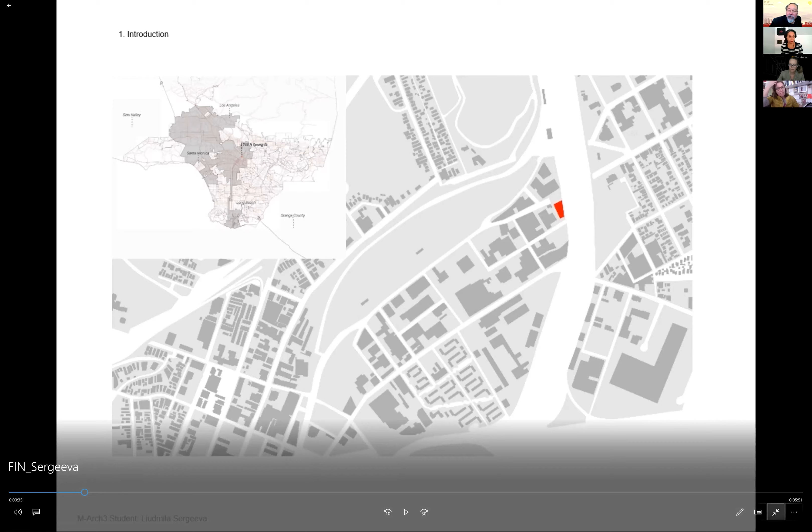Ludmila, are you presenting right now? Because we don't hear anything. Yes, are you going to share some sound? Yes, I'll do that again, looks like a little bit of technical difficulty. Okay, thank you for letting me know. Yes, I'm doing it again. Please let me know if everything is good. Sure, sharing.

Office buildings in Los Angeles typically have high energy consumption intensity. As a result, vulnerable communities across the Los Angeles area cannot afford to build them and use for dire needs. However, by adopting certain design strategies and incorporating PV panels, it is possible to sufficiently reduce the energy demand.

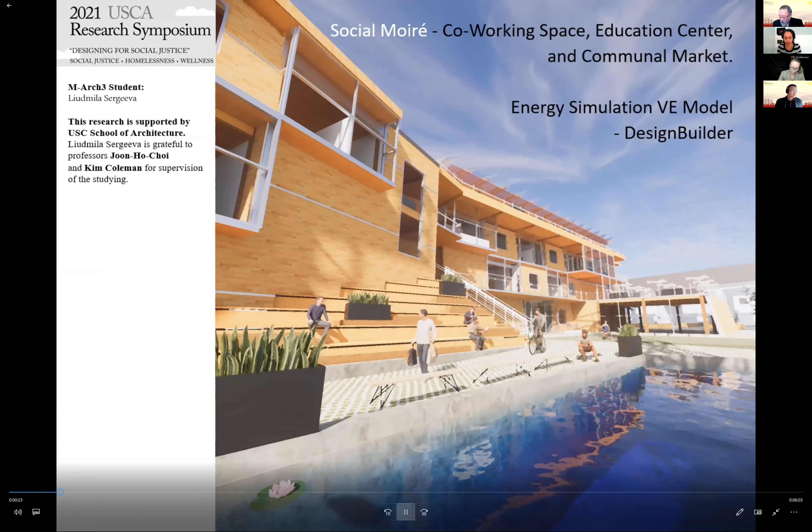The Social Moire project is within the boundaries of the CASP, the Cornfield Arroyo Seco specific plan. The CASP covers 660 acres of land in Chinatown and Lincoln Heights. The project site is within the boundaries of the LA River Buffer area, covering 20,000 square feet.

The Social Moire project provides many options for occupants. Its flexible environment has massive potential in every sector, such as wellness, technology, and different working environments. In accordance with the LA plan, low-cost co-working space can significantly help reduce homelessness by 2028 by providing more business opportunities and helping local communities become stronger and prosperous.

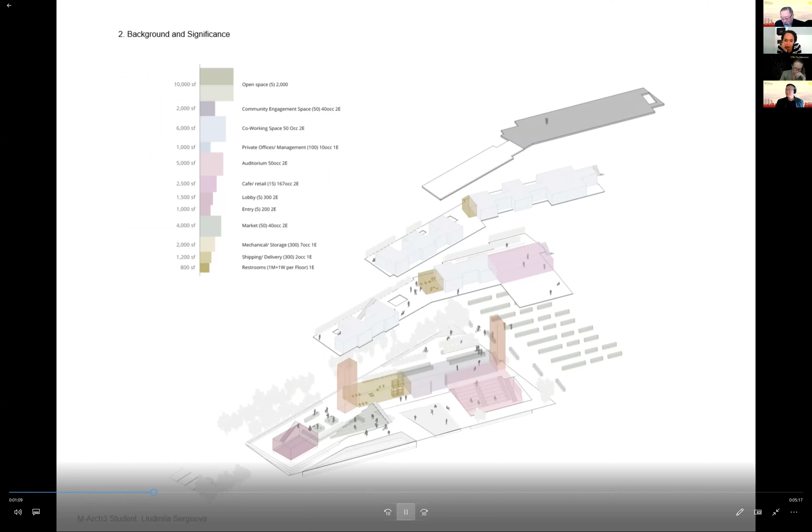Design principles of the Social Moire project, an affordable co-working space and educational center, were tested to evaluate building performance. The as-designed phase calculation includes CLT exterior wall efficient construction, HVAC air-to-air heat pump, and low-E triple glazing.

The as-improved phase calculation includes west-south part wooden battens fence density calculation, cool roof contribution and energy demand reduction, overhangs on the east-south part of the site, and PV and BIPV calculation.

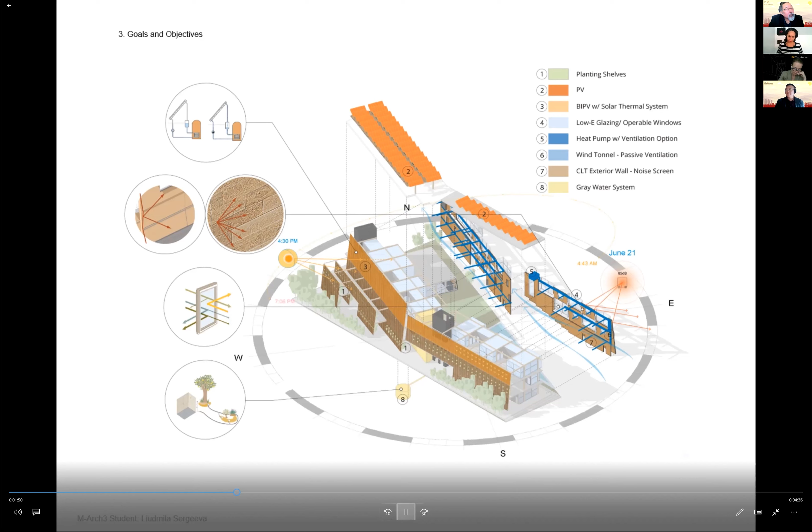Methodology Part 1: the climate features were collected via Climate Consultant, Revit sun and shade simulations, and Revit Insight solar radiation analysis.

Methodology Part 2: to prove the proposed design principles of the Social Moire project, Design Builder platform was used to make a virtual model and evaluate building performance. The project was done in Revit BIM application, and the model was exported to the Design Builder software.

Design Builder is an interface for the Energy Plus software. It supports detailed mechanical and electrical system data. Final energy analysis includes the building envelope, exterior wall, overhangs, and glazing type proposals, as well as HVAC system and PV panel demand to approach net zero protocol.

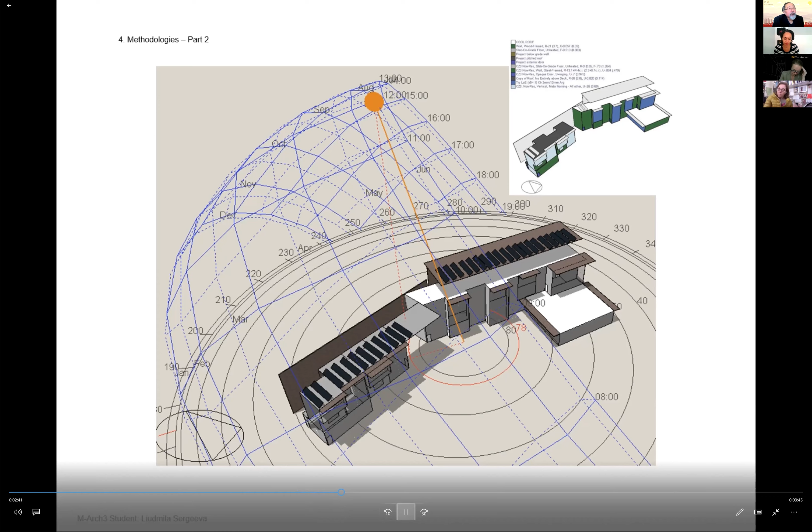The first phase of simulation, as designed, includes three main architectural strategies: CLT exterior wall efficient insulation construction at R21, 3.7 density, U-factor 0.057; low-E triple window glazing, E5=0.1 argon; and air-to-air heat pump as the HVAC source.

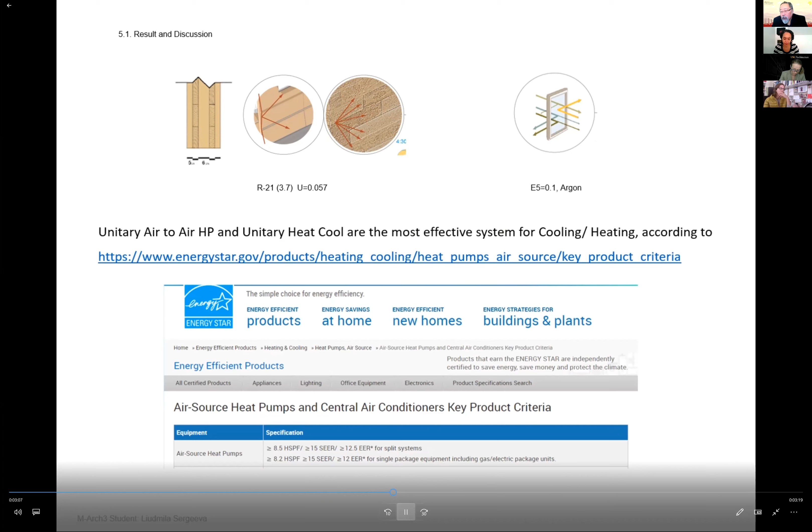After the features were applied, the simulation was done. Graphs and tables were produced, including fuel breakdown, temperature and heat gains, temperature and heat loss, and the end-use summary table was generated.

The second studying phase was the improved phase. In this phase, another three architectural strategies were tested. The first one was the west-south part wooden battens fence density calculation.

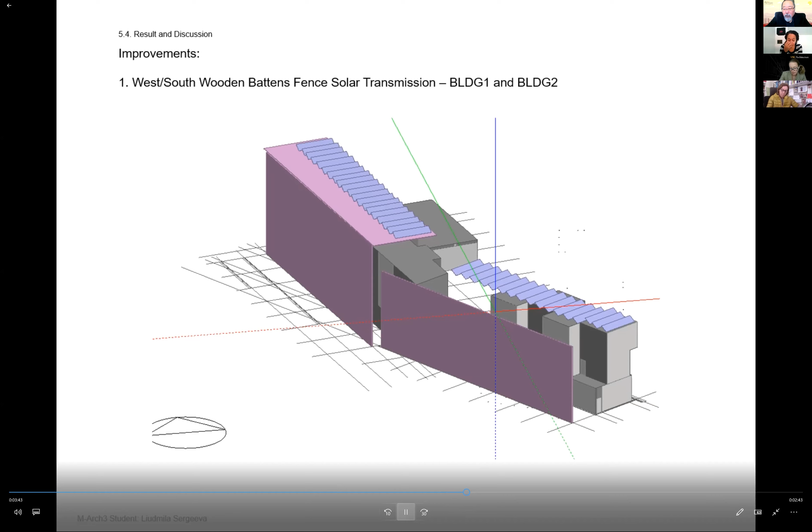As a result, 40% solar transmission was the most efficient for the project. The next improvement feature was overhangs on the west-south part of the site. These features were applied to the model using Design Builder settings.

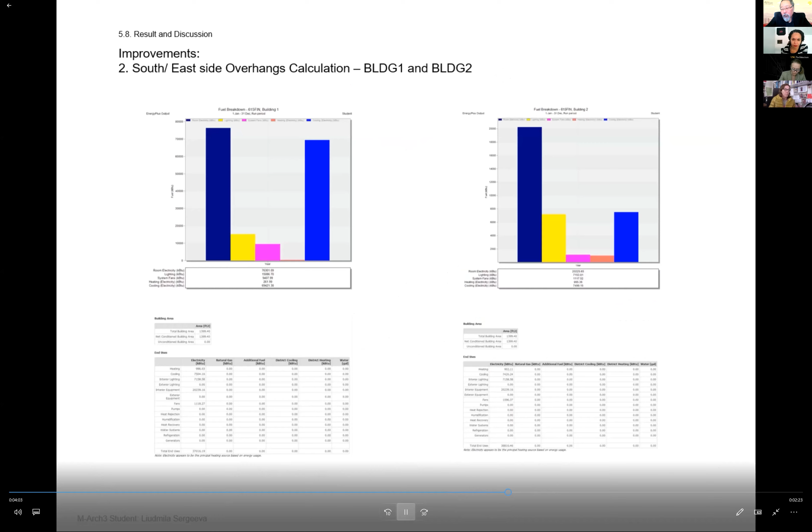The last improvement component to study was cool roof contribution to energy demand reduction. The initial result was a comparison of two phases, showing the three tested designs of the project buildings.

To drive the project to the net zero level, the necessary amount of photovoltaic panels was calculated. One more run of the simulation shows the contribution of the two project buildings' photovoltaic layouts.

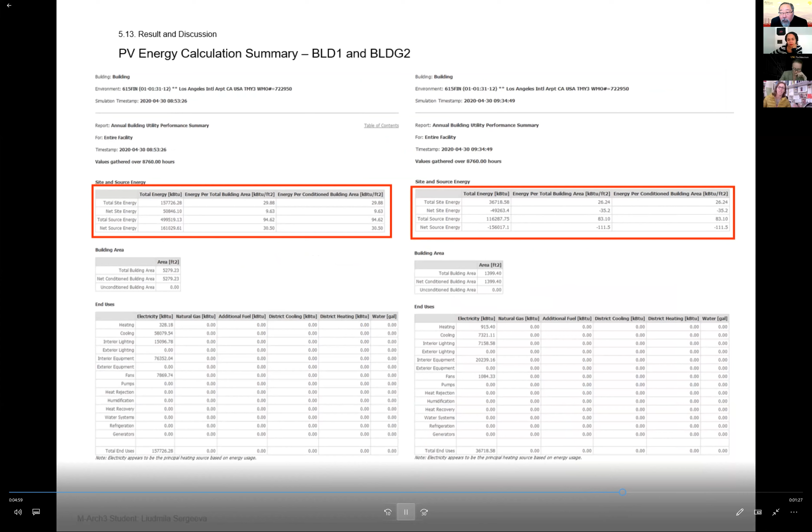The primary result was a correlation chart that shows that the calculated amount of photovoltaics was enough to cover the energy demand of the project.

The integrated result of the case study is an algorithm that can be applied to future research and projects. This algorithm explains that the simulation analysis can be applied on different phases of the project, from the very beginning to the final stage of the process.

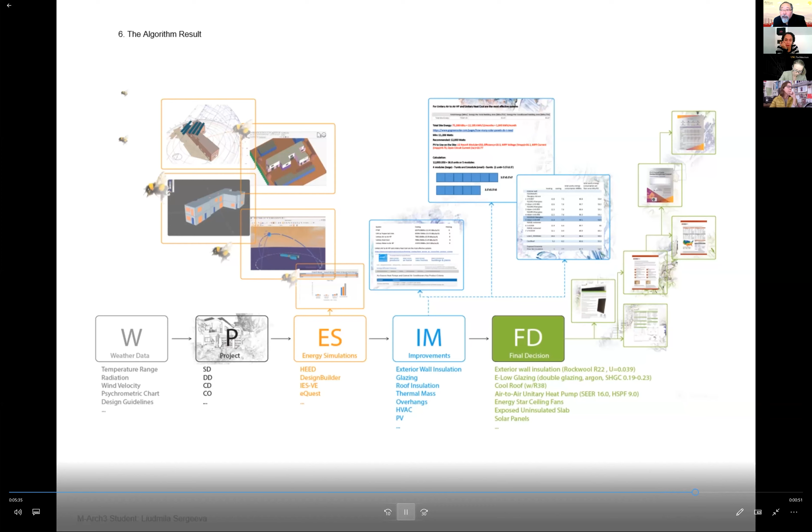To conclude, it's useful to have such simulations for communal affordable co-working spaces and educational centers. The outcome can possibly be disseminated widely. This work increases knowledge of how to make an affordable co-working space in order to approach diversity, equity, and prosperity of the local community. It could help create new building typologies and design solutions.

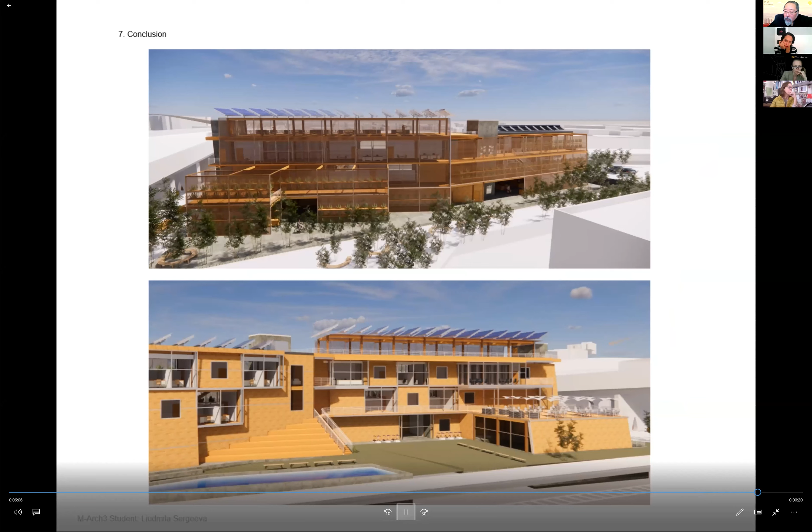In accordance with the LA Plan, low-cost co-working space can significantly help reduce homelessness by 2028 by providing more business opportunities and helping local communities become stronger and prosperous. Thank you.

Liudmila, nice, right on time. I love that. Yeah, very good.

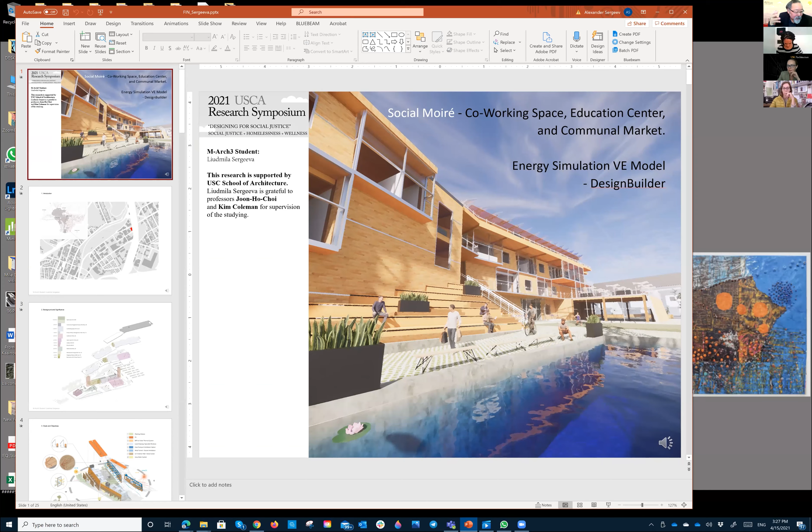Again, I think this is probably not a super fair question, but I'm interested in what is the concept of design justice that affected your project, beyond necessarily the idea of PV and insulation and high intensity glass. What are the other features of your project, or how did that tune your project?

So I did not present it today because it was part of the studio project, but it was designed to accommodate the needs of very low income communities.

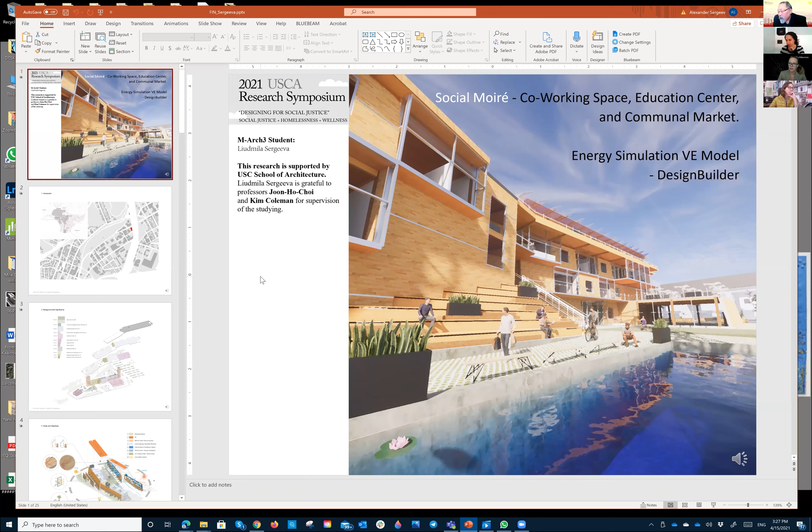When people are struggling to find a job and a place where they can communicate with each other, have resources. I designed those projects to be very open to the young people from the community and people of any age. It's a 3-story building with a communal market to provide more jobs.

There's also a library there and a theater, and its name is actually Hope. So at that time I thought about how to have a good place to start your business or continue your business in very difficult circumstances.

Very good. I don't know if anybody else has questions. Okay, I think we'll just try to keep things rolling, and we're going to go to Kennedy Wells.

Cool, good timing, Kennedy. Okay. Not quite full screen, but it's on screen. Yeah, okay, there you go.

Hello and good afternoon. My name is Kennedy Wells, and this is my presentation on biodegradable material and how it can be used in housing.

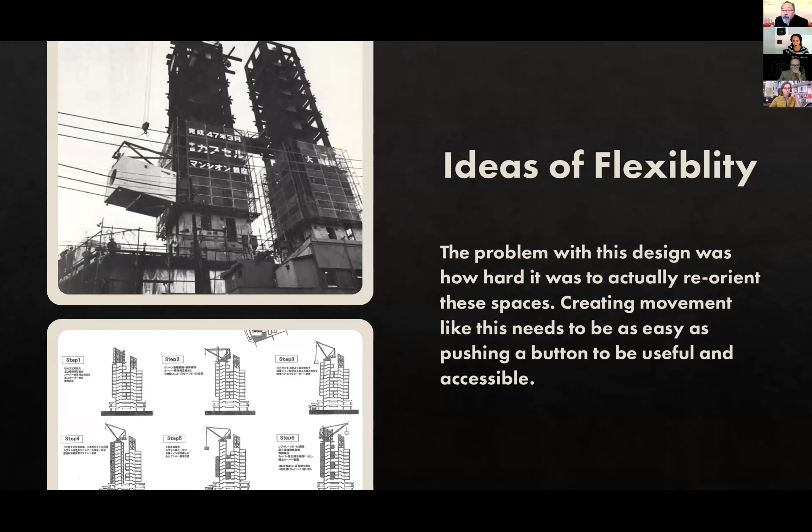Previous movements in dynamics and architecture, such as metabolism, reflect on the idea of flexibility when it comes to architecture. However, they attempted to do so with materials that were inflexible in nature, such as concrete and steel. With buildings like the Nakagin Capsule Tower, you have the problem of creating a system that needs high maintenance and has embedded technology that prevents evolution. Steel and concrete create a time capsule rather than something that can develop and change.

This leads to the issue where we have a partially abandoned building that is too expensive to remodel and too expensive to destroy. At this point, at the destruction or remodel stage, we have a huge issue of waste.

But the answer to this is multifaceted. By understanding the life cycles of buildings and the context of larger ecological systems, and creating buildings that decay organically into the environment, we can create ethical cycles of construction that keep up with the evolution of technology.

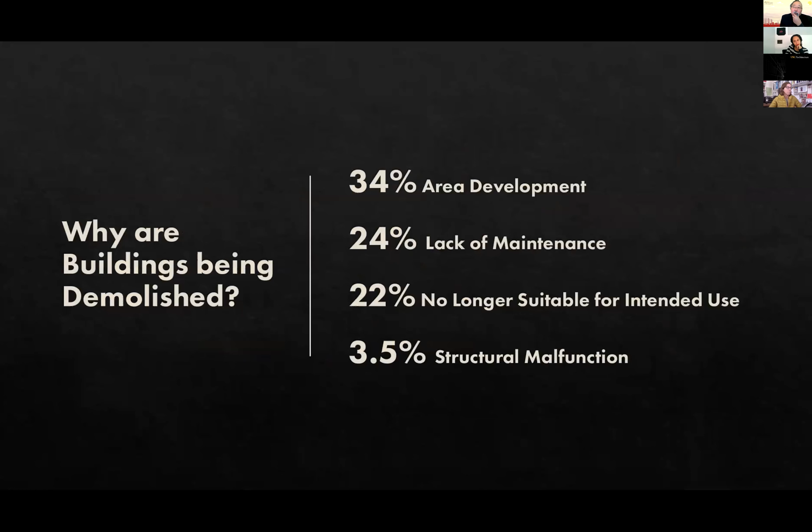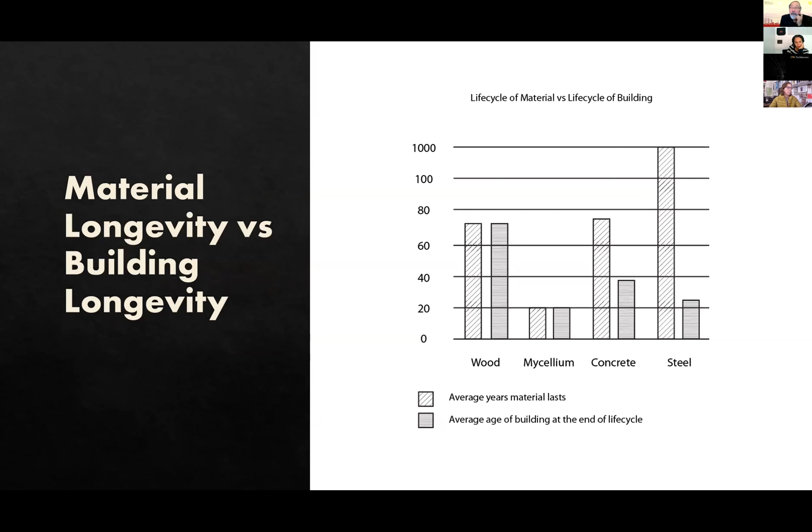Buildings are demolished mostly because our society has moved past the need for them, rather than their material longevity failing us. Most of these buildings are made of steel and concrete, not to correlate the two, but to show that we build a large portion of buildings out of these materials for them to barely last 25 to 50 years. Yes, these are recycled somewhat, but it costs energy and pollution. So by turning to more biodegradable options, we can greatly reduce our carbon footprint and waste production.

I chose mycelium. Mycelium is a great material because it does not need artificial energy to grow. It lasts 20 years, takes 5 days to grow, is cheap to produce, and is fire resistant and mold resistant. It can be made into bricks and paneling depending on the shape of the mold you put it into.

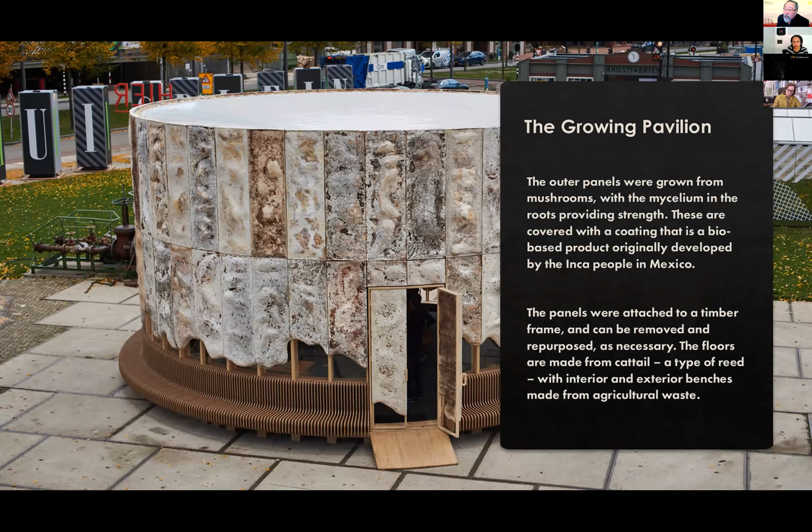For my project, I've decided to use wood as a structural component, as mycelium is strong but is not structurally sound on its own. Specifically, I've chosen Valley Oak wood, as it naturally grows in the area of Santa Monica, and it is strong, fast-growing, and native.

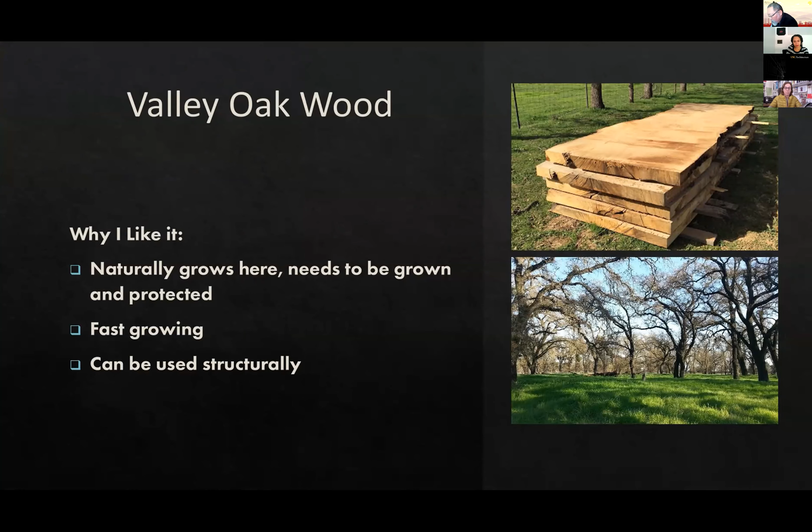This way we can restore some of the native planting to the area whilst constructing housing. The site I've chosen for the project is the old Santa Monica Airport.

It is a large parcel of land that would be slated for new construction in 2028. Unlike its previous use, which catered only to the wealthiest, dedicating this parcel to housing and urban forestry gives the citizens of Santa Monica much needed housing and green space.

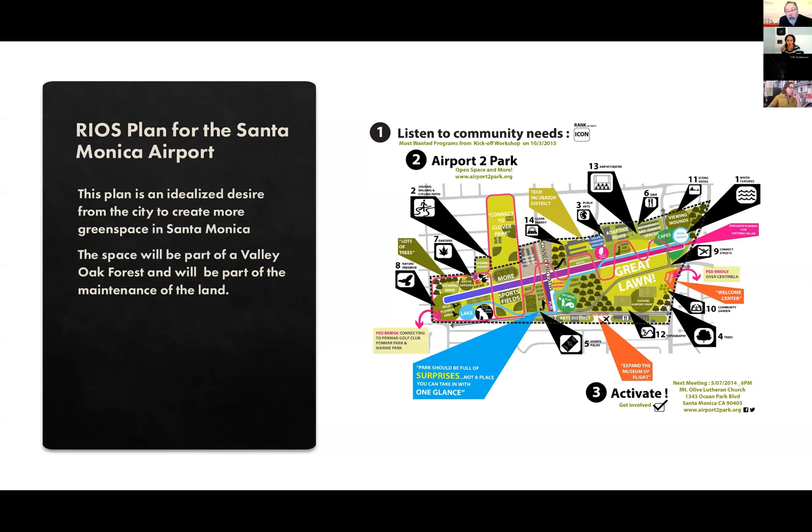The part I've chosen has been overrun with invasive species and still has much more of its natural slopes, which is ideal for native landscapes.

Working along with the Rios plan, the community will be planted with valley oaks and other native plantings. My design has housing, a valley oak forest with trails, a system to collect rainwater for landscape, and solar panels. The mycelium processing area and the wood processing area utilize existing airport buildings; it is important for this to be done on site to keep construction as environmentally friendly as possible.

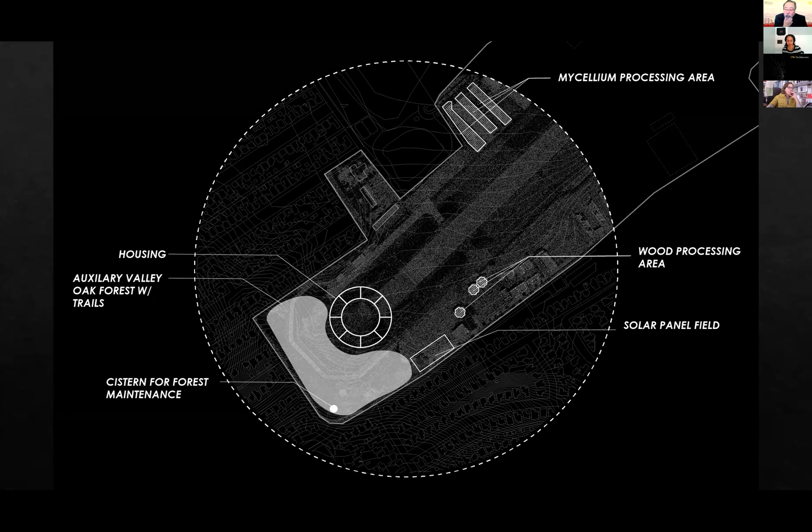First, the wood for the wood process. The wood is chopped down, then brought to the wood processing area to be reshaped for parts of the structure. Then the wood is brought to the housing area to be built into the structure.

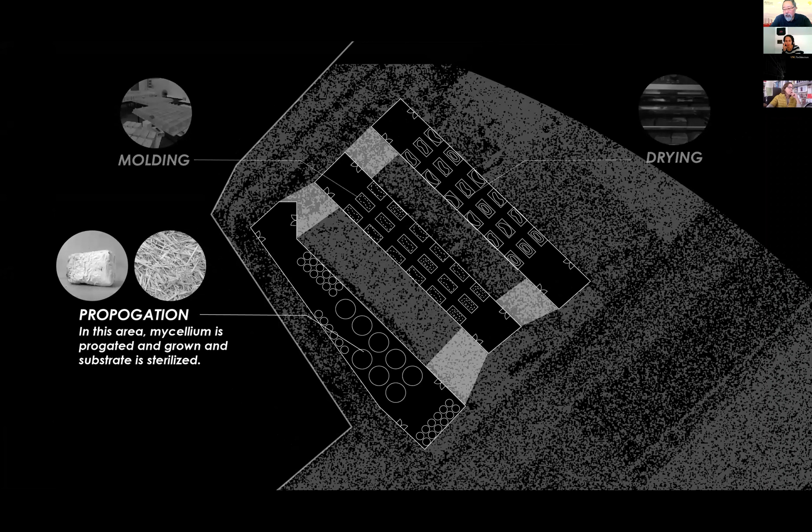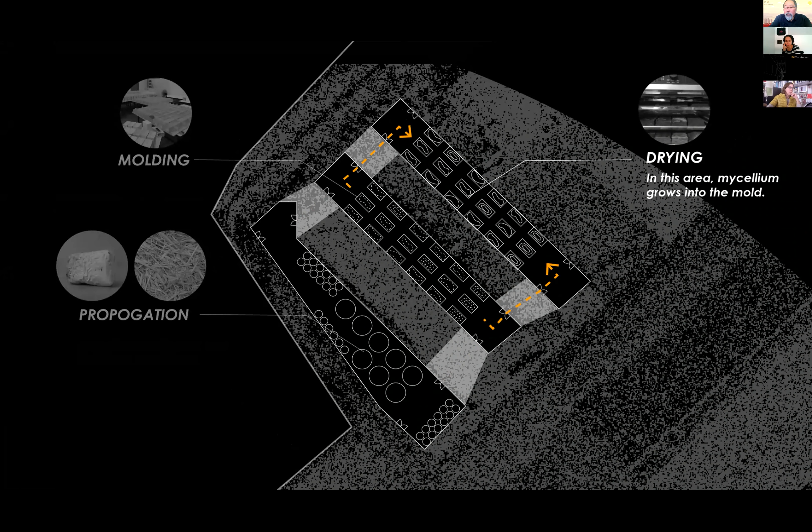The mycelium process area is where the mycelium is grown, molded, and dried. The whole process takes over 5 days to create panels for the walls. First, the substrate is sterilized so the mycelium can grow on it without risk of infection. Next, the mycelium is tightly packed into the mold and left to set. The mold is left to dry and grow into the mold further. Then the mycelium panels are brought on site and built.

First, this community starts as a grove of valley oaks. At first, the community is relatively small, with a small community center to boot. As it builds, the program of the buildings can change, become bigger or smaller depending on what's needed over time. The program can shift from housing to more mixed use or commercial if needed, depending on what the area demands at the time.

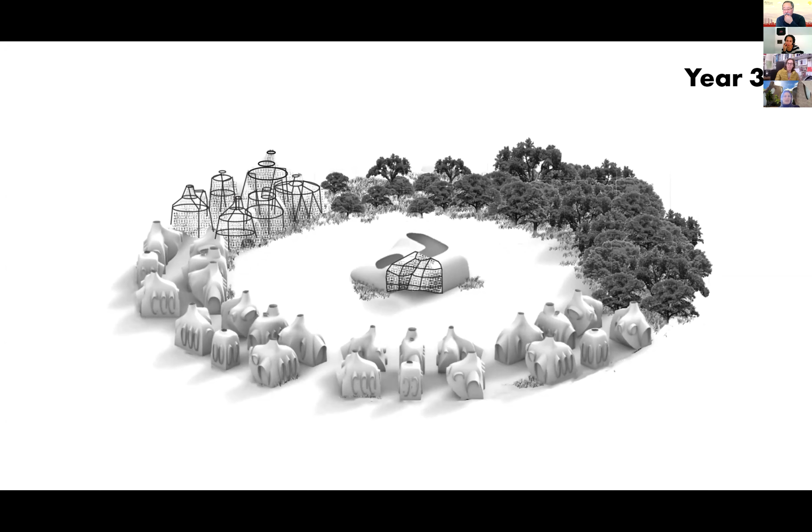As the building begins to decay, it becomes a new typology, a remnant of the space that used to be. This material will be left to decay or be reused. Then the land will be allowed to fallow. In its space, new oaks will grow. This allows for controlled use of these native trees to make sure they regrow in the place of trees used.

The housing originally was a mixture of different size housing to cultivate a community of different lifestyles and backgrounds. The decaying stage will allow for new types of infrastructure to emerge. Like Gasworks Park, spaces like this show the structure once was there. This curated fixture will show the beauty of the organic decay of space.

The final stage is the return to the original state. This will allow for the urban forest that the community can utilize as a great green space. Thank you for listening, and does anyone have any questions?

Cool, Kennedy. So you're saying the decay is about 5 years or so of that nature? I mean, I think it's fascinating. I love it. But wait, so what did you say, how long is the decay process, do you think? Or what happens at the end of the life? Do you just leave holes in the building, or are there other ways of, I don't know, speeding up the cycle?

Decay - I mean, I think allowing it to be partly planted will definitely increase decay. Just having a greater amount of ecology in it brings about more bacteria, more fungus, more things that tear things down. I feel like the 5 year cycle is more about building than decaying, but that's kind of the idea.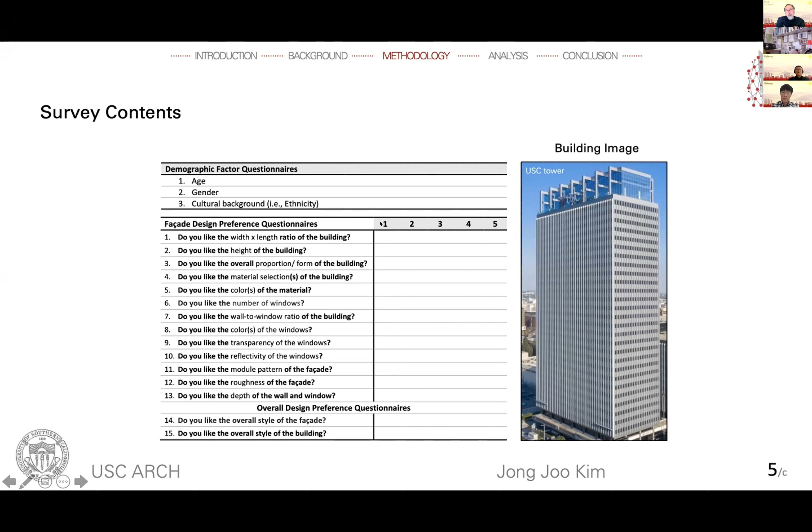You can see this is based on the 5-point scale, where the number 1 indicates very dislike, and 5 indicates very like.

So you just do the same.

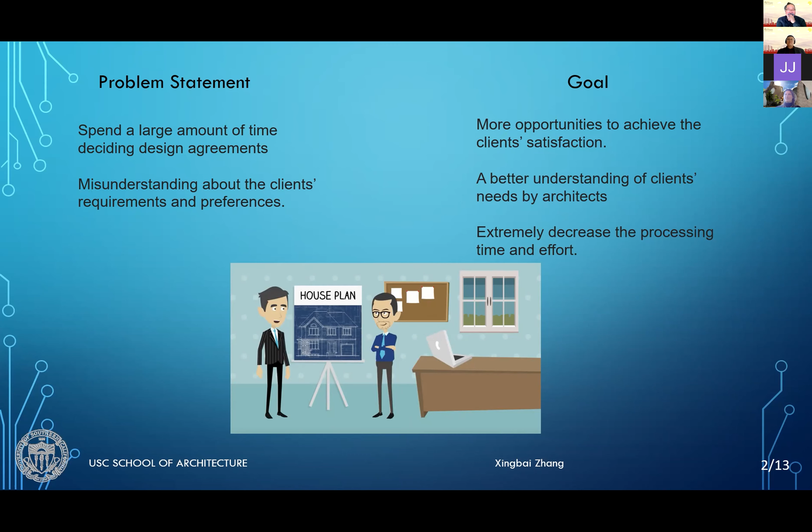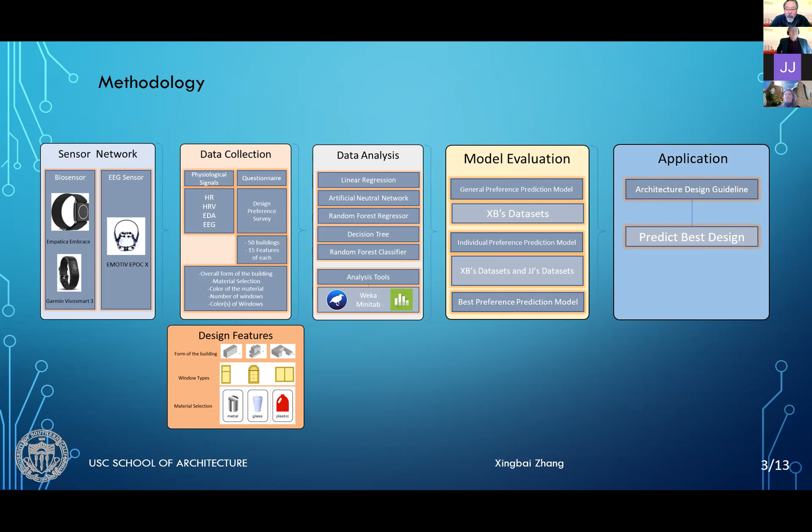In the future, we hope this research can help architecture firms predict the best model for the best design for the client. This is the sample of the design preference survey Jong Joo Kim talked about before.

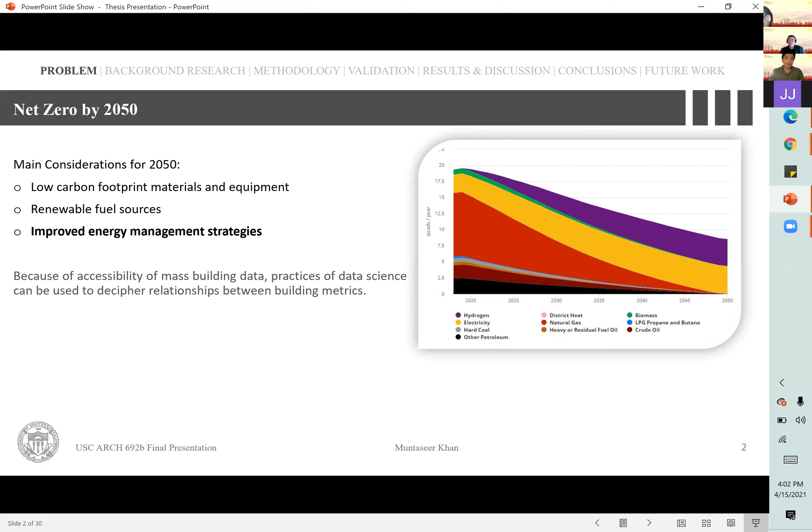A quick note on our goal to net zero by 2050: our main considerations are using low carbon footprint materials, using renewable fuel sources, and improved energy management strategies. Because of the accessibility of mass data, practices of data science can be used to decipher relationships between building metrics. I did some background research, and the building metrics guided by ASHRAE standards or Energy Star standards are updated every few years.

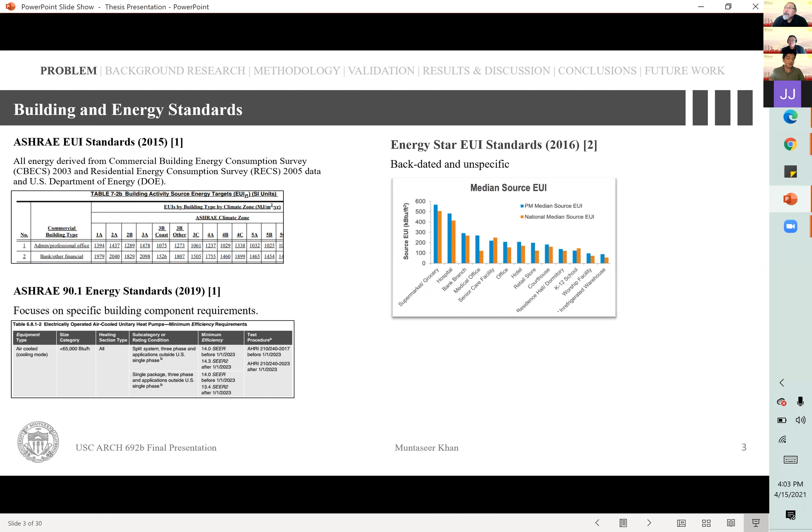And they're kind of backdated — ASHRAE EUI results still use data from 2005 building data. So that needs an update, or perhaps a way to guide them in a more modern way. So a few case studies that I've done to understand how building components impact energy usage.

One case study on how data science is used stated that machine learning is the future — faster, more organized computation for building energy prediction. I'm going to skip this part to save time, sorry. So my hypothesis is the building envelope is a significant factor that contributes to energy usage and should be given more priority in designing future buildings. Key energy hungry components of a building are ranked, and this is used to establish a region specific performance guideline.

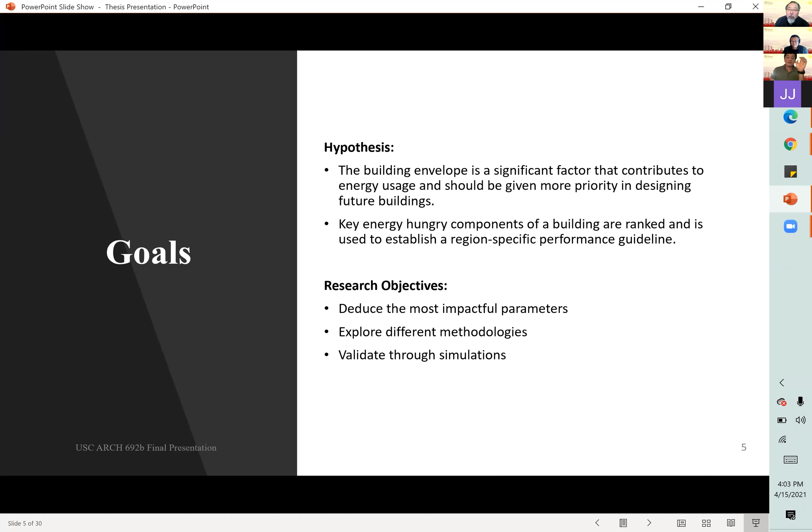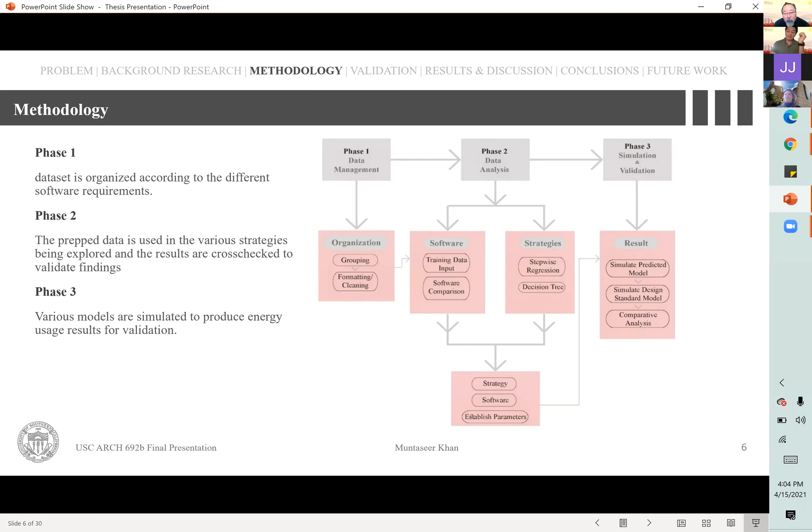So my methodology goes like this: it's broken down into 3 phases. The first phase is to organize the data, clean it up, and make it ready for the machine learning or statistical softwares I use. That's my strategy in phase 2, where I use the data to explore strategies and find the most impactful building components and rank them. In phase 3, I will use simulations by Design Builder to validate my ranking system, to see which components are more important and which are not.

It's explained how I did that in my thesis paper, which I can provide. The first strategy I explored was a statistical method, where since we have all these building components as different variables, stepwise regression uses all the variables and then picks which are the most important ones. There are different kinds of regression, but I used forward regression, which from the get-go predicts the most impactful parameters to the model.

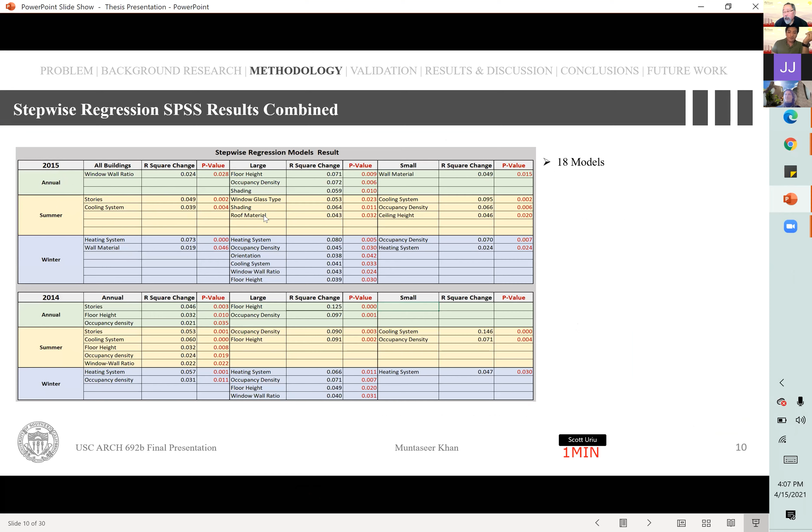So from the data that I have, 18 models, and from those 18 models, I have the most impactful parameters for each of these boxes. For annual 2015, all buildings energy, only the window wall ratio seemed to be the most impactful parameter. For the summer of large buildings, it was window glass type, shading, and roof material. So all 18 models are over here.

From that, using the frequency of how many times these variables showed up, and also their R-square change values, I could get my regression ranking, in descending order. Occupancy density is seen to have the most impact, then floor height, then heating system, and the least impact was the window frame type.

So the second strategy I explored was the decision tree method, which is a flowchart-like structure. I used a J48 algorithm, which chooses variables in descending order of significance. I'll get into this a bit more right now.

From Weka, I used the Weka software to generate my trees. These trees - if you notice, each of the highlighted pathways represents low energy usage. So each pathway is like a configuration for energy use. For cooling, if I use the chiller, and for heating, a boiler, then the footprint is rectangular and window type is tilt turn, I get low energy usage. So from this one model tree, I get five configurations of low energy usage.

In the same way as my other table, I broke it down like this. Each model shows the configurations of low energy usage, and breaking that down further to create my ranking system, I put the values in - I know it's hard to see, I apologize. But it's basically using the prediction accuracy I got from my trees, and the frequency of how many times it showed up in the trees, to produce my ranking.

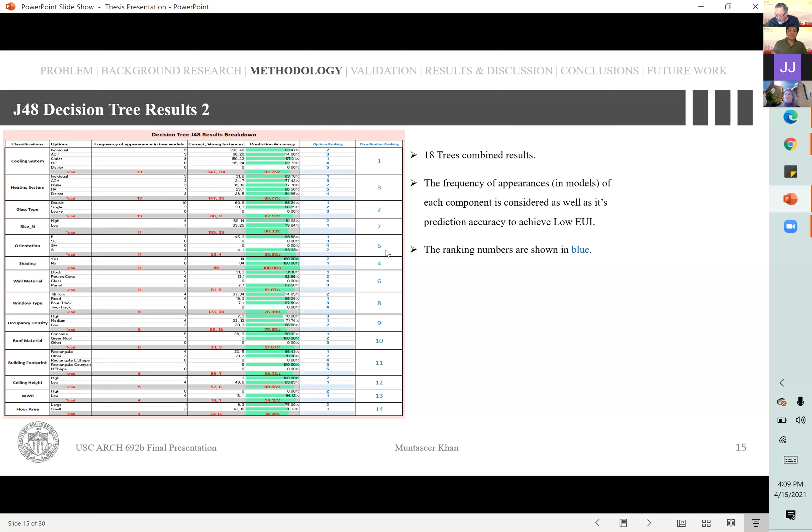The cooling system here is seen to be number one, most impactful, then the glass type, then the heating system, and so on. So from that, I get my ranking system, and also the ranking of which components are more popular versus which are less popular.

And then I got another ranking from Professor Marc Schiler, who provided his ranking based on his intuition. I just provided him with the variables and asked what he thought, and he gave me his ranking. So I can compare the three and see which one makes more sense through my simulations.

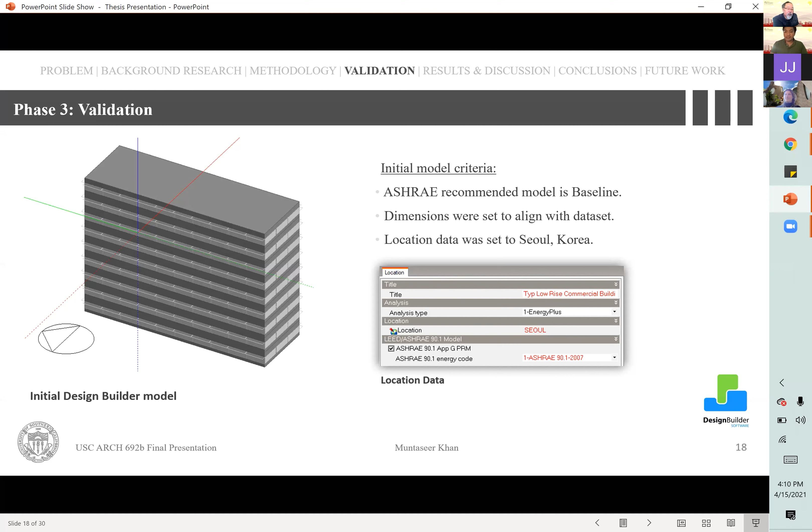So then my validation begins in Design Builder, where I made the building based on my existing data set and the building components I picked - the HVAC system, wall material, and so on. The baseline was the ASHRAE recommended components, and the location was set in Korea because my data set is all Korean buildings.

Muntaseer, I think we need to wrap it up.

Okay, I apologize. I don't know if you can, quickly go over some of the main subjects, but I think that's my point.

So I have the baseline and the improved components, and I compare how I changed the model. Then I have the results, how much each component improved, to see how the ranking works.

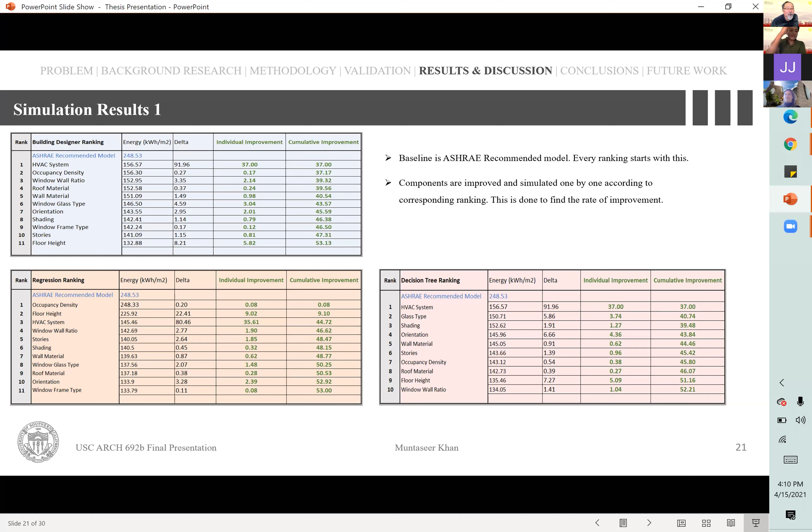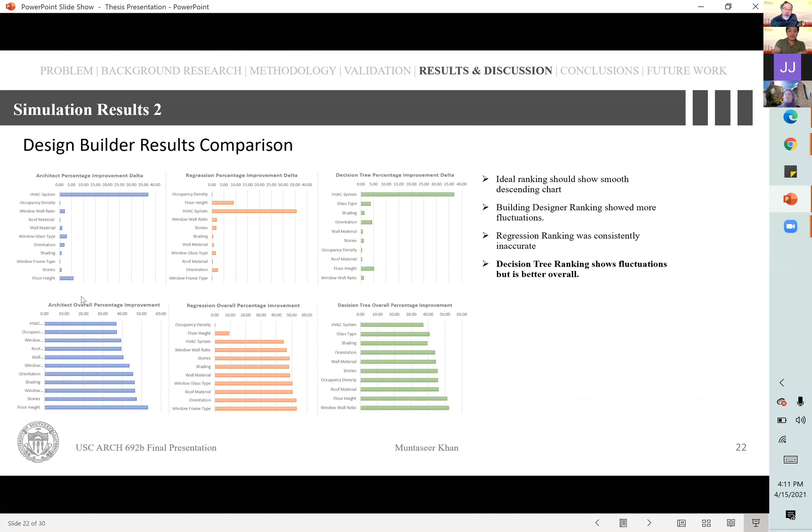So this is my ranking system. A good ranking system would show a gradual decline in energy for each component.

So, from this, the three comparisons, my decision tree produced the best results — better than the human, the building designer ranking, or regression ranking. I did another validation for decision trees, which also checked out.

My conclusion was that the decision tree proved to be a potential option when finding the most effective building components in design, and region-specific component criticality should be considered.

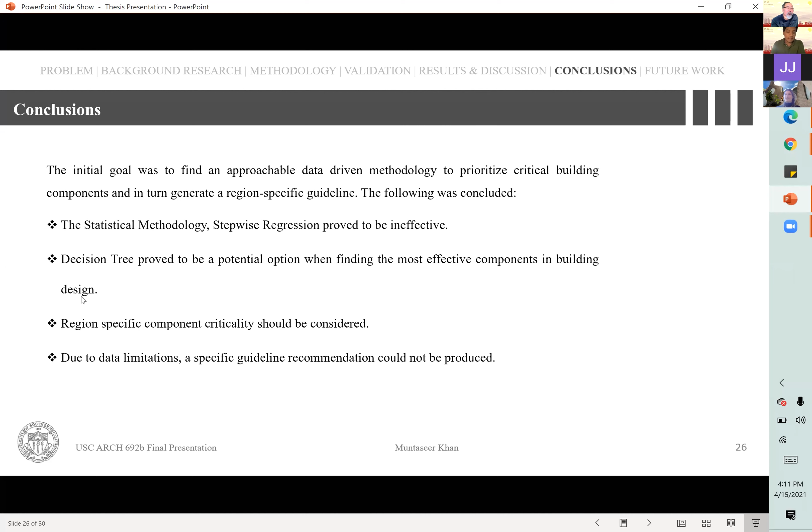Due to data limitations, a specific guideline recommendation could not be produced. This is because the data set lacked granularity, grouping and assumptions limit the specificity of the outcome, and there is a lack of variation in the data set.

All right, I think we're going to have to move on, Muntaseer. Yeah, I think that's past. So I apologize, it was long. Very good.

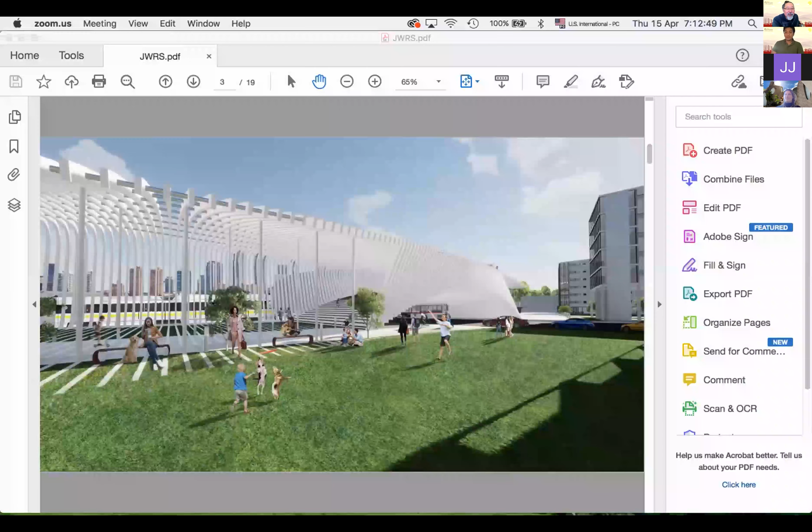Hi everybody, my name is Justin, and I'm a fourth-year student in the VR program. The project I will be presenting today is Veiled Rays.

Veiled Rays performs as an urban corridor that unifies the two lots along Exposition Boulevard, allowing travelers arriving by metro to easily move between the plots, otherwise separated by traffic, and located by the Crenshaw Station, which is the first stop of the metro journey from LAX. Veiled Rays will serve as a city gateway, signifying an inviting entrance into the Crenshaw neighborhood and into the city of Los Angeles.

The challenge of this project was to design programs that serve to improve the community aspect of the site while addressing the issue of homelessness exacerbated by the forces of gentrification in the neighborhood.

The initial reaction to the site was a sense of defensiveness, demonstrated through the absence of green spaces and hefty exteriors of the local typology. In addition, the high traffic volume around the site prioritizes vehicles over pedestrians and cyclists, making the site an unwelcoming location for visitors.

To challenge this notion, the proposal works to counteract the narrative of a defensive neighborhood by the introduction of park elements. Referencing the site plan, the gateway is situated along Expo Boulevard with the residential blocks located at the back of the site. The two elements are connected by outdoor parks, which invites both visitors and residents to enjoy the outdoor elements the space offers.

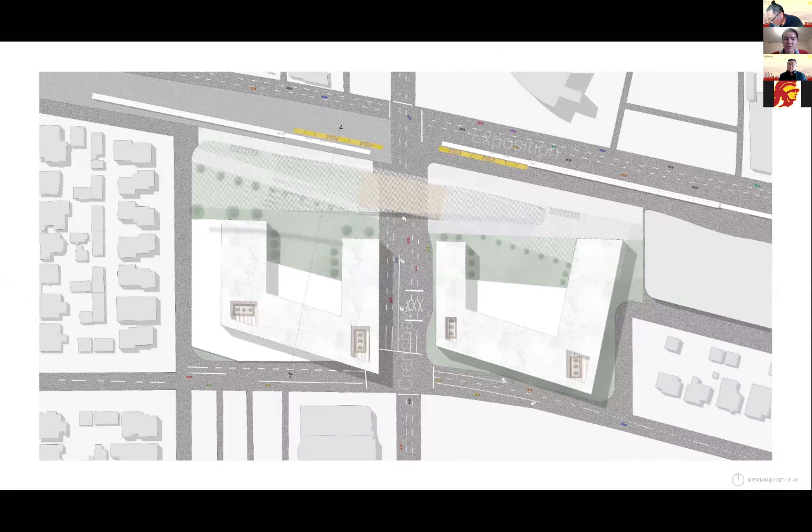As can be seen by the gateway's slat nature, Veiled Rays behaves as a screen, filtering the scenes and ambient noises from the bustling traffic along Expo Boulevard, while opening up to the park plazas to create a pedestrian-friendly oasis in the middle of LA.

At times, the structure extends into the turf on the ground and melds into the natural landscape. Not only does this formal language strengthen the gateway's relationship with the park, but it also strengthens the occupant's sense of community and relationship with the site.

Having decided an appropriate area and volume for the gateway, several operations were undergone to arrive at the final design. The first move was to bend the geometry outward to engage with the community, carving a way to allow vehicular access underneath. Then the geometry is distorted to signify the beginning of the path where the metro station is located, and in doing this, the gateway also engages with the site.

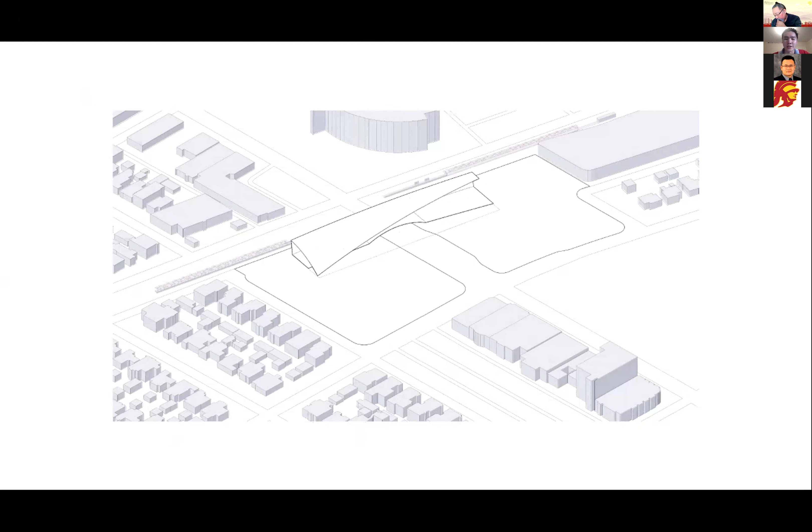The edges of the resultant mass are then bent to form a canopy that curves from one end to another, to obtain a much lighter, streamlined appearance that draws visitors in.

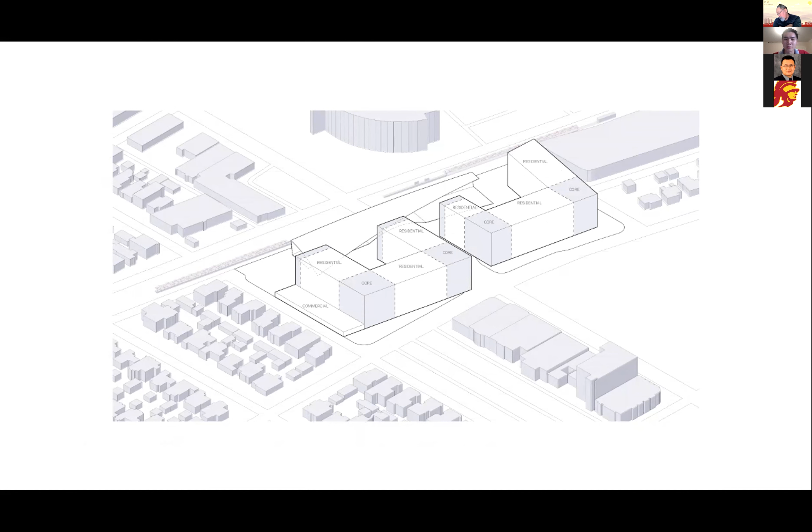Then the location of the two residential blocks are marked on site with the kind of open-arm gesture of the U forms, inviting visitors while allowing ample sunlight into the outdoor plaza and into the units. The three wings are connected by green cores that penetrate through the levels of the buildings at the corners.

The two residential buildings are designed with the intent to provide affordable housing for the local community, in efforts to resist the effects of gentrification.

A total of 510 units of at least 600 square feet in size are proposed in the scheme, providing living spaces for 1,000 to 2,000 people. Co-living lounges are added to each of the three wings for cooking and communal dining, with interior green spaces at the corners acting as wellness zones for residents.

To maximize the number of units, the residential blocks are built up to their allowable height of 80 feet. And in each apartment unit, there's a balcony looking out into either the street or the inner courtyard to allow continuous supply of fresh air and ambient sunlight into the living quarters.

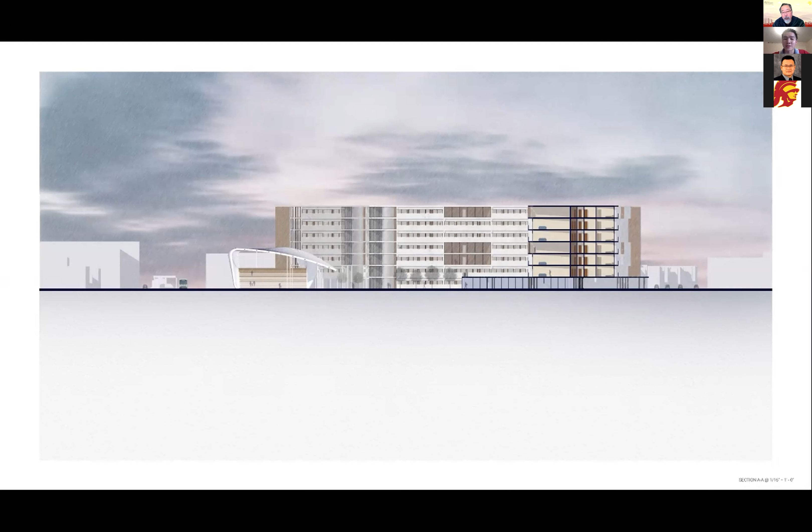Louvers are also introduced along the south facade, which is on the right side of the drawing, to avoid direct sunlight into the units.

Inspired by the WELL and LEED standards, art pieces are hung up along the walls inside the interior green zones, allowing residents to bond over art and nature. Pets are also welcomed in the wellness zone, where residents can relax and enjoy their afternoon reading alongside their companion.

And here on the second floor of both the apartment buildings, the podium level overlooks the courtyard and back at the gateway, inviting locals and residents into the park space in lieu of staying indoors.

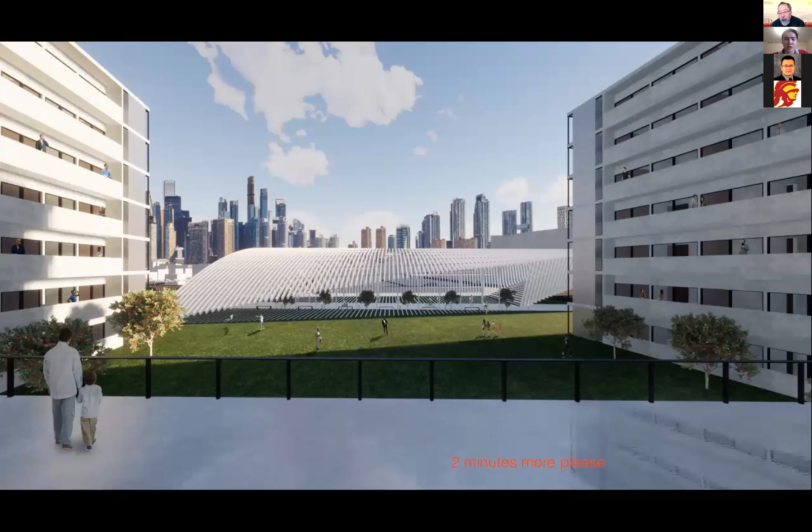And likewise, the co-living spaces share a similar view into the courtyard to strengthen the connection between the living quarters and the outdoors. And underneath the canopy of the gateway, the scenes of sunlight filtering through the foliage is emulated by the slats, blurring the boundaries between the structure and the park to accentuate the gateway's sense of place in the bustling area. Thank you.

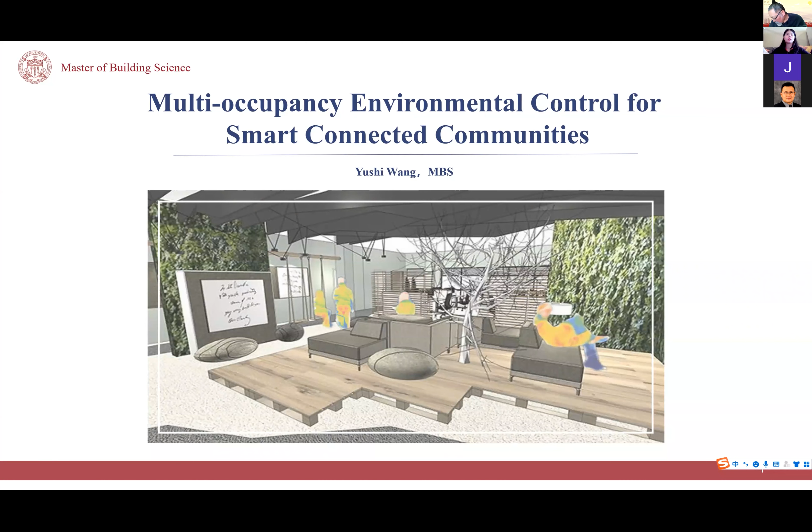Nowadays, humans' demand for thermal comfort in the indoor environment has gradually narrowed from a whole building to a small classroom or an office desk.

It seems easy to change the microenvironment by using a small heater or fan, but we cannot carry a heater with us to each public space, like a theater, library, or bank. So how do we set the temperature in such a public place to continuously satisfy all the people in that group?

Our project aims at thermal comfort control in a multi-occupancy condition in the entire community environment.

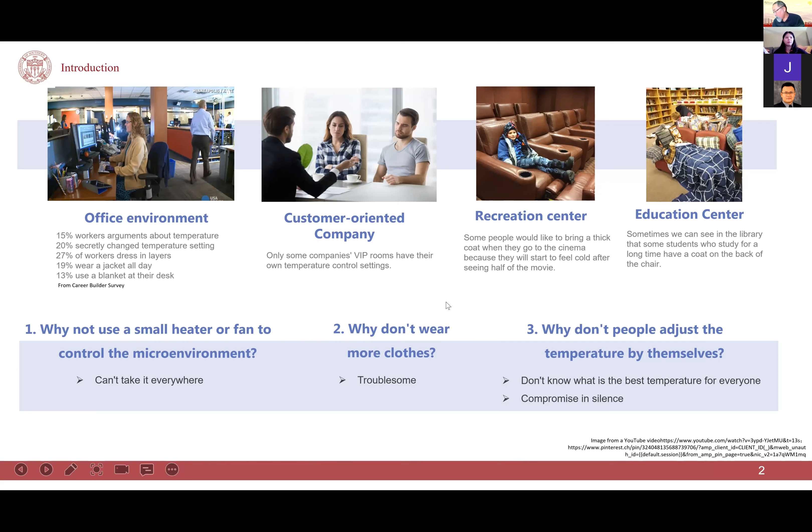People carry the HOBO to collect environmental data, and they also wear a smartwatch to collect physical data like heart rate, stress level, EDA, and skin temperature.

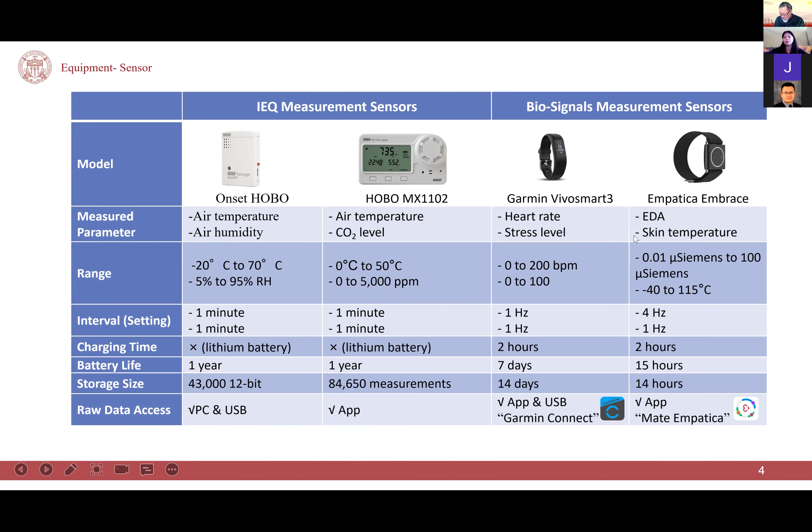After we collect the personal data, we use different machine learning algorithms to build a thermal comfort model and test which one performs better in a group. Finally, we did a verification test in a real multi-occupancy condition.

There were 30 people who participated in the single occupancy test. They carried the HOBO and wore the smartwatch for a whole week, taking it everywhere they went, and gave us feedback on their thermal sensation and thermal comfort level. They also recorded their clothing level and activity level every 30 minutes.

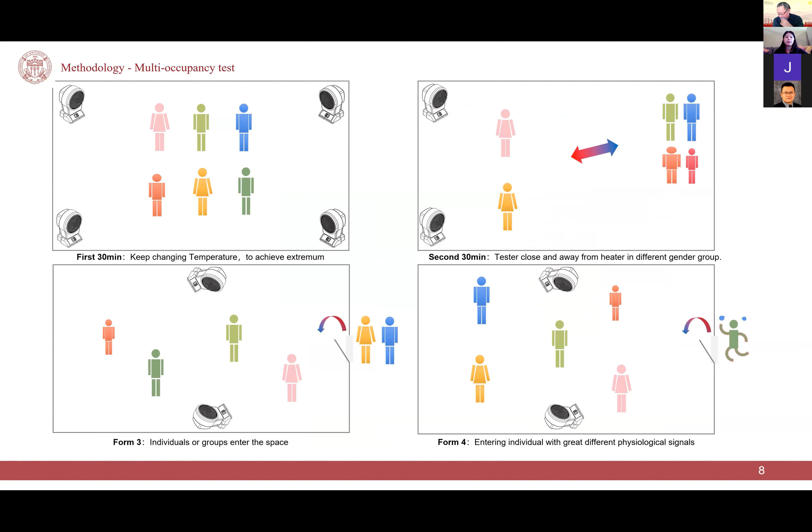There were 6 people participating in the 2-hour multi-person test, and we tried to collect more data. We had them wear different kinds of clothes and stay at different activity levels in order to gather more data over those 2 hours.

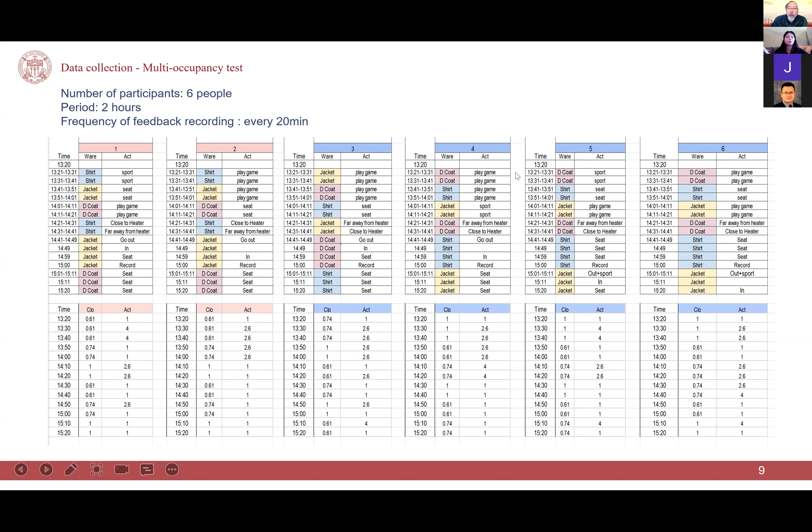So these are all the models we built for this project. There's a linear regression model, which was built as a baseline. First, we used decision tree and random forest to build the individual thermal comfort model.

Then we simulated these two models in a group test with data selected from the 30 people, and found that random forest performed better, so we used it in the final 6-person test.

The average accuracy of each model is almost 70%. It seemed to be a very good result, but since each person only has 19 records of data for training, there might be some overfitting problem for this model.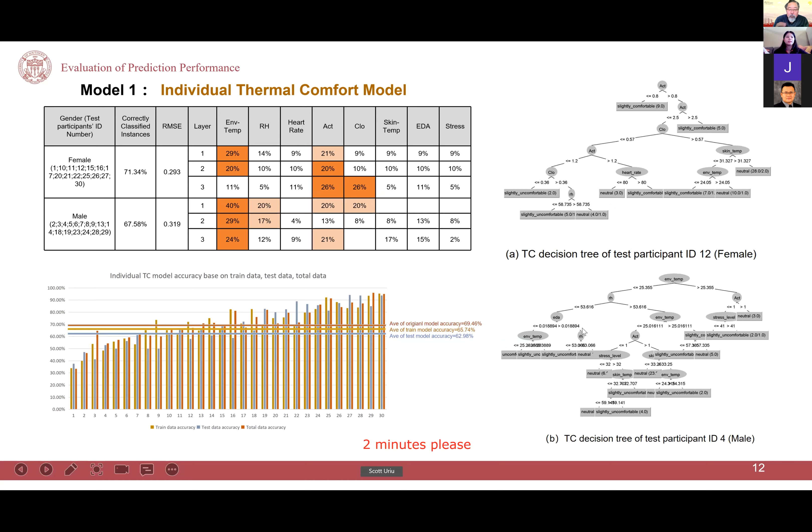Then we used random forest to build a compiled thermal comfort model. The random forest is composed of many unrelated decision trees, which looks like this. It works by generating multiple classifier models. Each tree learns and makes its predictions independently, and these predictions are combined into a single prediction by voting. The performance of the random forest is generally better than that of a single decision tree.

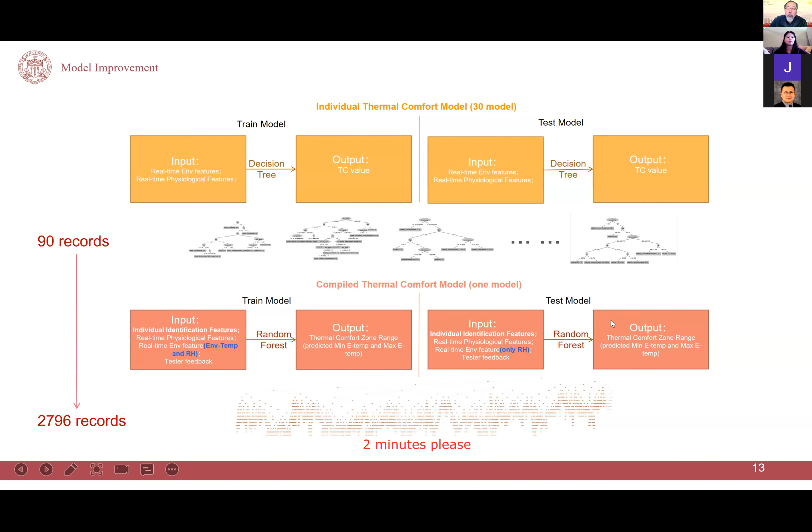In the compiled thermal comfort model, if we input one's identification features, environmental features, physiological features, and also their thermal comfort and thermal sensation, the model will predict one's comfort boundaries, which look like this - from which minimum to which maximum temperature people will feel great comfort in that range.

We also compared the compiled thermal comfort model with the traditional PMV model. We found that the range of the predicted comfort zone is much narrower than the PMV model, and the accuracy is also higher than the PMV model.

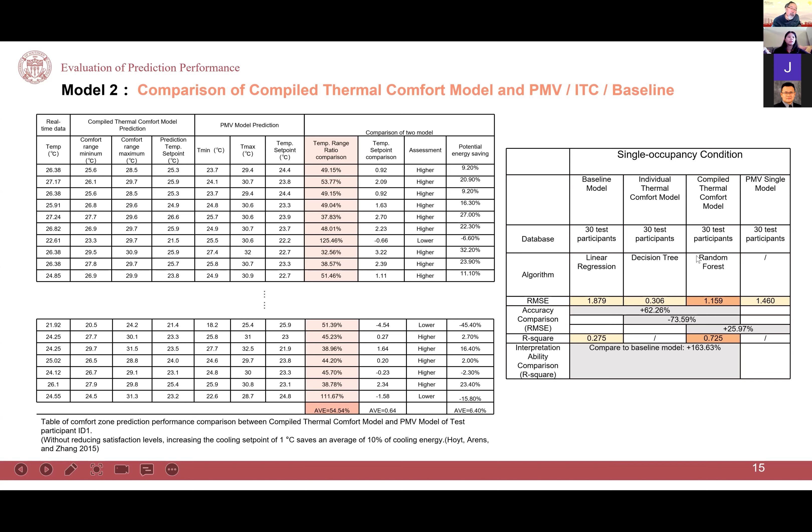Then when we try to use the model in a group test, we need a multi-standard decision-making mechanism. So we have two evaluations. One is the overall thermal discomfort, OTD evaluation, which calculates the best temperature for a whole group like this.

In this picture, there are 6 people in the group, and in a range from 25 to 26 degrees, all 6 people will feel great comfort in this range.

The other way is sensitive-first evaluation. When someone is greatly sensitive to temperature, the formula will increase the weight of this person's influence, like the green line right over there. If this green line represents a child who only feels comfort under 25 degrees, the model will calculate a smaller range than the original OTD model.

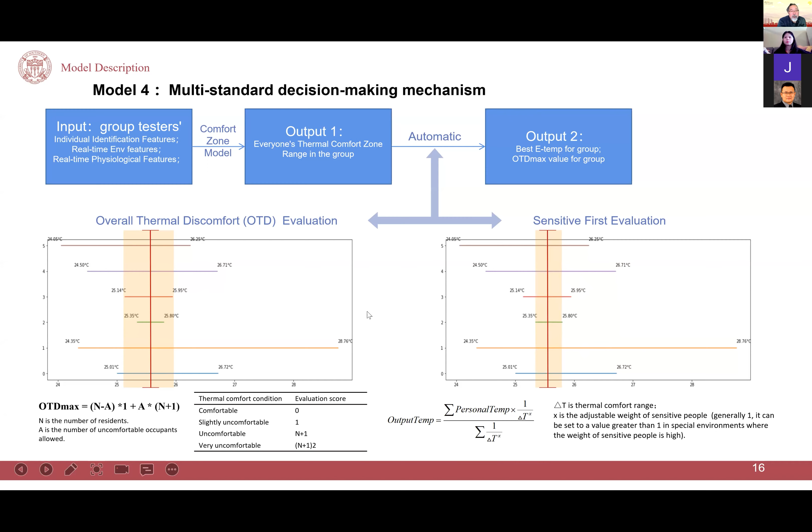So there's the result. We selected 6 test participants from the original 30 people. We tried to simulate which kind of model would perform better in a group test - whether the decision tree or the random forest.

From the result, we could see that when the temperature gradually decreases or increases, the OTD, overall thermal discomfort, will gradually increase, and more people will feel uncomfortable. The random forest model performs better than the decision tree model.

So then we used the random forest model in a real test. This is the result - the line shows the test participants' thermal sensation feedback, the red line is the environment temperature, and the other line is the prediction by the compiled thermal comfort model. We could see that when the tester feels very hot, the predicted temperature is much lower than the environment temperature during that part.

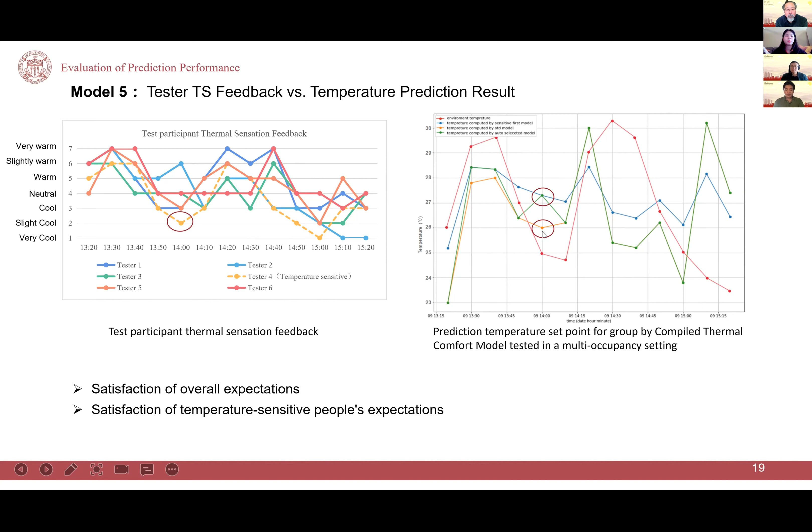The blue line is predicted by the sensitive-first model, and the yellow line is predicted by the OTD model. The sensitive model is a little bit higher than the OTD model, which means the sensitive-first model could meet the requirements of sensitive people's expectations.

Great, so we need to wrap it up. I think one of the jurors is leaving very soon, so you're kind of going over a little bit. Okay, there are only 2 pages left.

We also compared the compiled thermal comfort model testing group with the traditional PMV model, and we found it could have better accuracy.

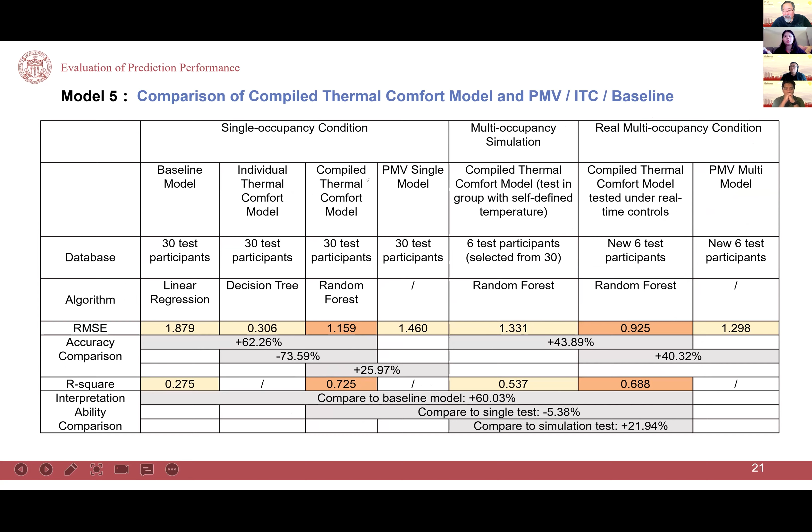Finally, comparing all of the models we tested, we found that random forest performs very well, whether in the single occupancy condition or the multi-occupancy condition. Yeah, that's it.

All right, great. And we are going to Hector Covarrubias del Cueto. My apologies for butchering your name again. No worries, it's Hector Covarrubias del Cueto. Almost nailed it, but it's all right. I'm kind of used to it. I'll dive right into it, going ahead to share my screen. Okay.

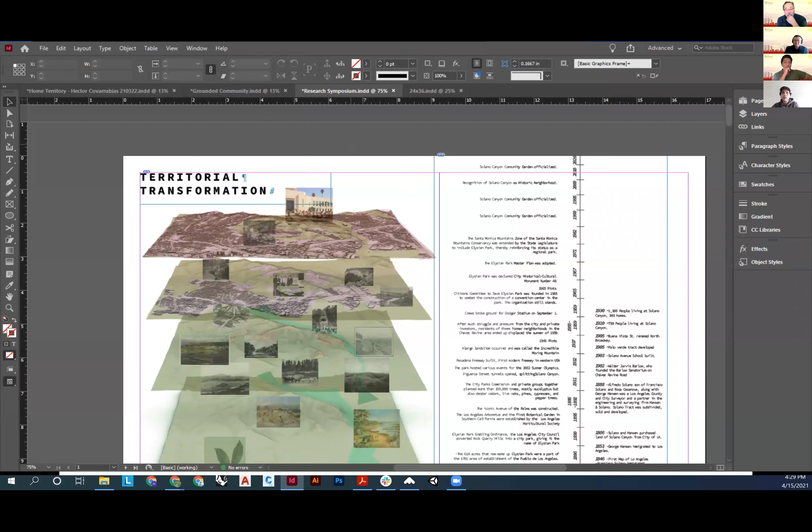Elysian Park, the oldest park in Los Angeles, represented sacred sanctuary for the indigenous communities of the region. In cases of great flooding, communities along the river would take refuge there. Its forests were carefully cared for as they provided shelter, water, and food, as well as a place of sacred burial.

The relationship between sanctuary and people was reciprocal, for people saw sanctuary as part of themselves, their elders, and their spirits. Yangna, one of the Tongva's most relevant sites, was located on the banks of the Los Angeles River, close to the area where the park is. Today, this site is a bastion in the fight against the pandemic, and also in case of emergency and natural disaster. This land represents the sanctuary where people in need meet, the cultural convergence point where processions and gatherings from diverse territories convene.

Beyond the decimation of the site's ancient forest and the extraction era of Stone Quarry Hills, the major scars are of topographic and hydrologic nature. The area featured 5 ravines. In 1876, Reservoir Ravine was twice dammed.

Between 1886 and 1892, the City Parks Commission and other private groups planted 150,000 trees of foreign origins. Solano Ravine became Solano Canyon neighborhood in 1900, and then Chavez Ravine is still there, but its conditions have certainly changed.

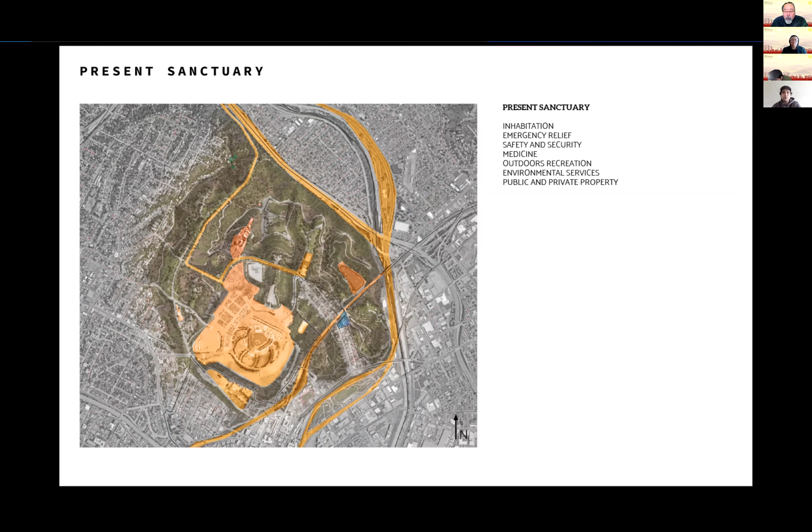What happened with the construction of Dodger Stadium can be seen as a contemporary culmination of a process repeated throughout Mesoamerican colonial history, where the invader-conqueror culture erects construction atop the relevant cultural locations to portray dominance and superiority over the conquered.

Inmates with mental health problems increased 150% from 2010 to 2020. 35% of the entire jail inmate population is in this status.

The Conservation Work Program offers services to inmates and recently released ex-convicts, including education-based incarceration, camp training, back on track, substance treatment, reentry transition program, community-based organizations like Bureau of Community Transition Unit, and additionally justice-involved programs as the ones provided by Telecare corporations, focused on assisting mentally ill, paroled, or on probation individuals.

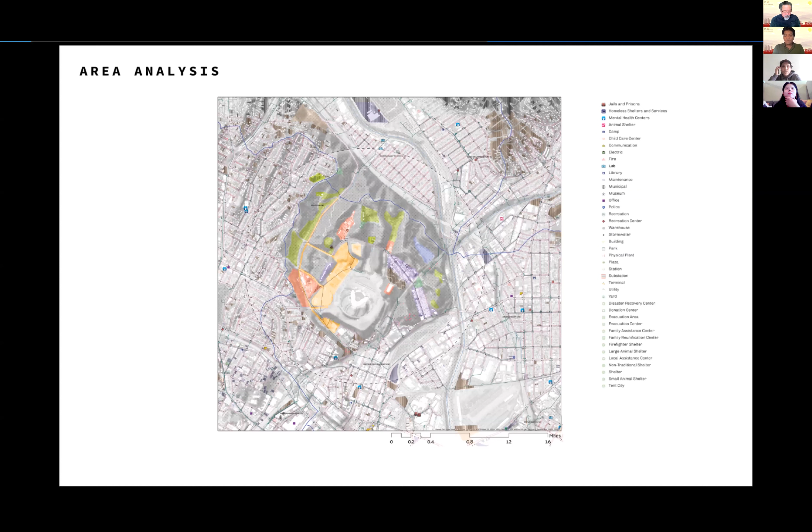Surprisingly, out of all of these programs, there is not one focused outdoors, given the well-documented healing capacities of outdoor environments.

So in terms of healing spaces beyond emergency and disaster response, particular sites within the park have been dedicated to healing. I want to mention 3 key places: Barlow Respiratory Hospital, established as a tuberculosis sanatorium in 1902, active ever since.

The Elysian Park Adaptive Recreation Center, dedicated to helping members of the community with mental or physical disabilities. And Solano Community Garden, emerging from an area prone to neglect and erosion that employed at-risk youth, ex-convicts, and unhoused individuals, resulting in lower recidivism and providing opportunities for restoring the ancient reciprocal relationship with sanctuary.

The experience of Solano Community Garden can be instrumental in replicating this healing power throughout the park.

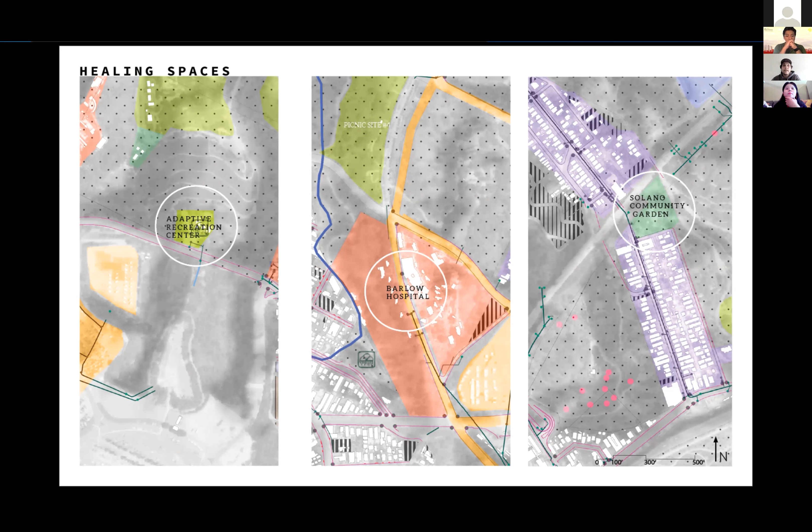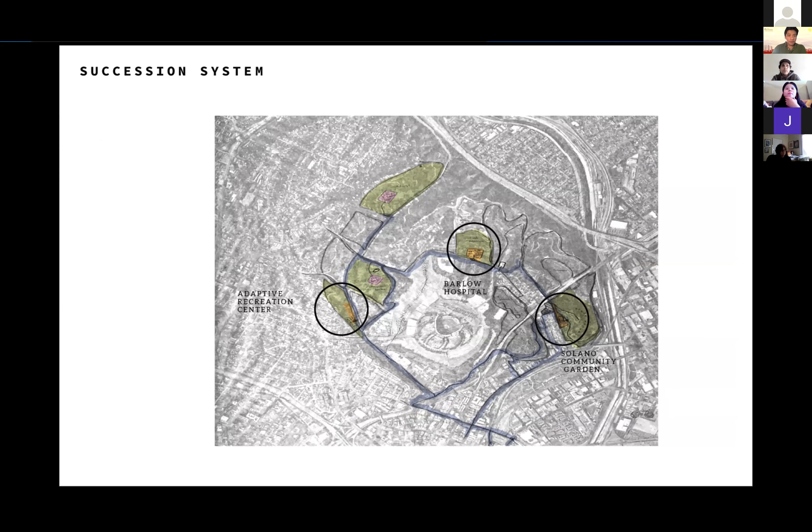So in working on assessing the potential of Elysian Park area to restore the ancient reciprocal relationship between people and sanctuary, individuals in need can be supported and also support the sanctuary that shelters them, articulating an attractive alternative to existing methods to assist unhoused individuals.

Because I believe that there is no reason to criminalize the mere existence of an individual, and in hopes of alleviating the unhoused crisis, supporting the situations of at-risk youth and the mentally ill, and in hopes of healing and recovering the ancestral relationship to the land and the physical and biological manifestations of that relation, these strategies are being assessed in their potential to turn this past and present sanctuary into one where people and land can heal through reciprocity and congruence.

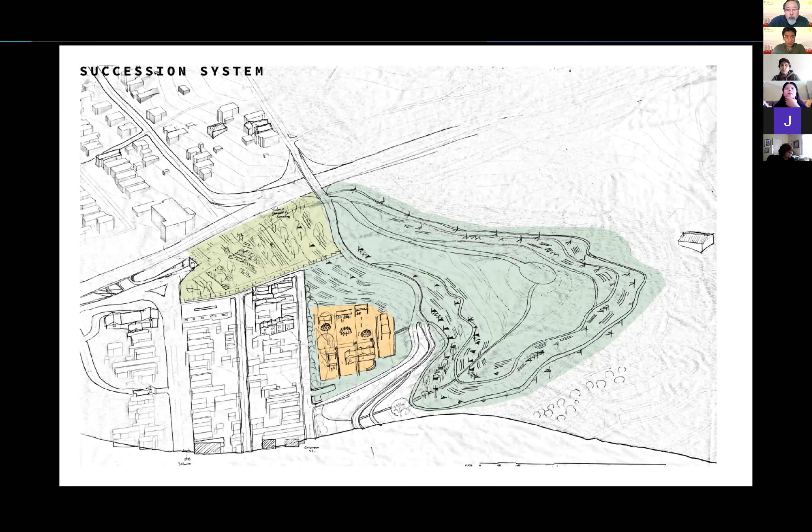Hector, let's try to speed it up. I'm sorry, sorry. I'm done, yeah, that was all. All good, thanks.